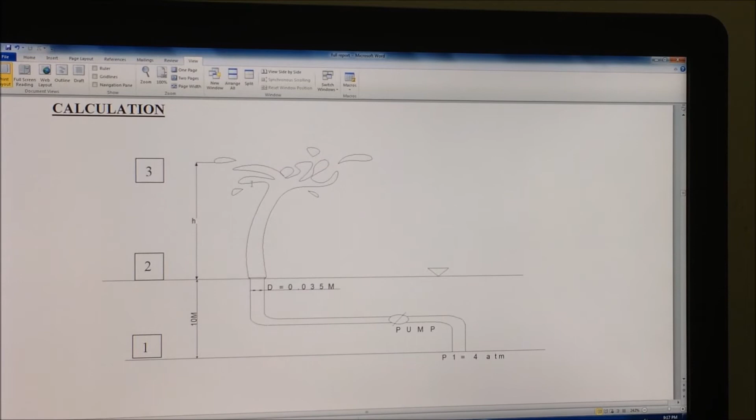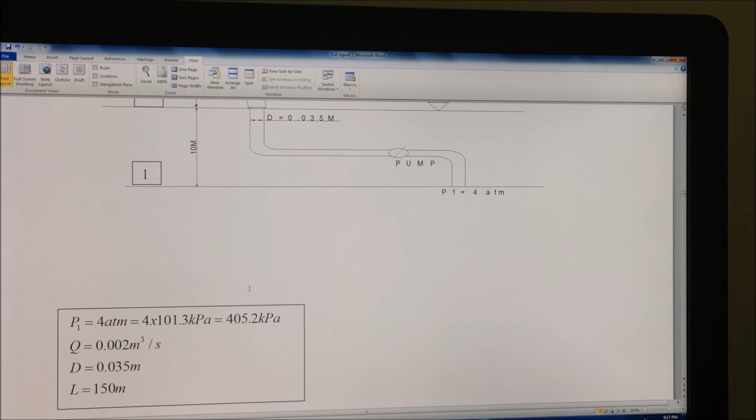Going to proceed to the calculation. For our calculation, this is our assumption for our project fountain. So we assume that the pressure of the underground is 4 atm, which is 405.2 kilopascal. And we assume that the flow rate of the pipe at the exit and entrance is 0.002 meter cube per second, the diameter of the pipe we use is 0.035 meter, and the length is 150 meter. So this is our Bernoulli's equation for our project, which we use to find the head pump.

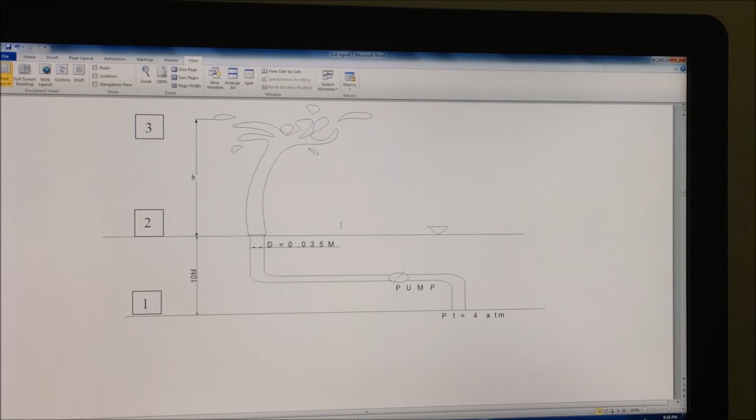So for the first step, we are going to find the velocity of the pipe. We are using the continuity equation, which is Q in equal to Q out. So we can get that the diameter of the pipe at the exit and entrance is the same, so we can assume that the velocity of both is the same, which is 2.08 meter per second. After that, we are going to find the major loss of the pipe.

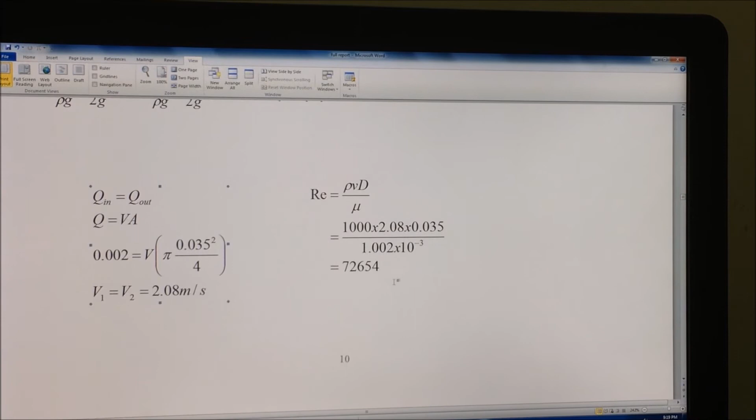We are going to use Darcy-Weisbach for this to find the major loss. First, we are going to find the type of flow of the pipe. So we are going to use the Reynolds number, and we get the answer is 72,654. So we can get that this is turbulent flow in the pipe. After that, we are going to get the value of f, the friction factor.

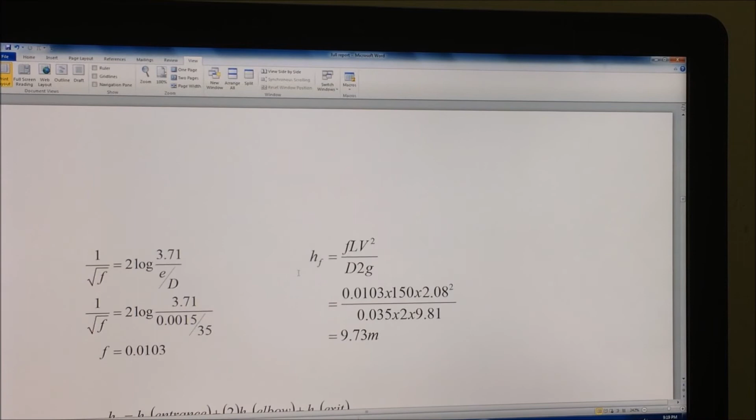We use von Kármán equation to find f, and the roughness e is 0.0015, which is the copper pipe. So we can get that the friction factor is 0.0103. After that, we are going to substitute f into Darcy-Weisbach, and we get the answer of the major loss is 9.73 meter.

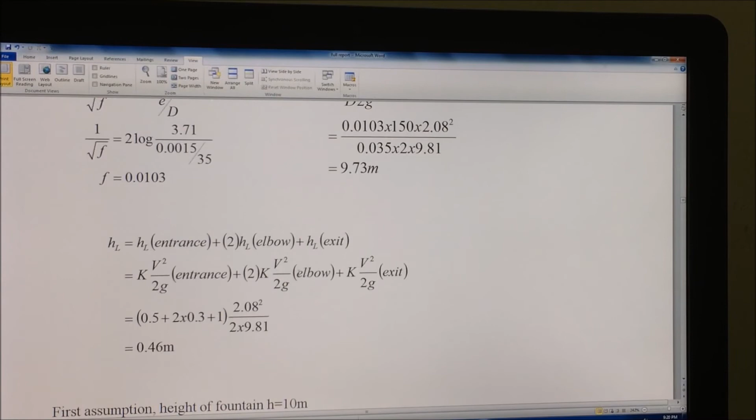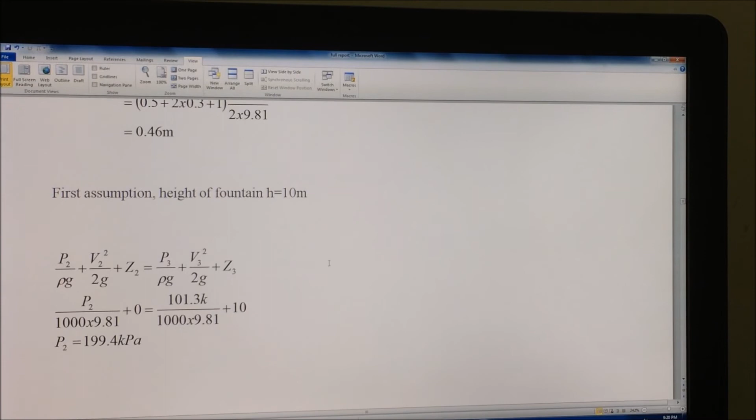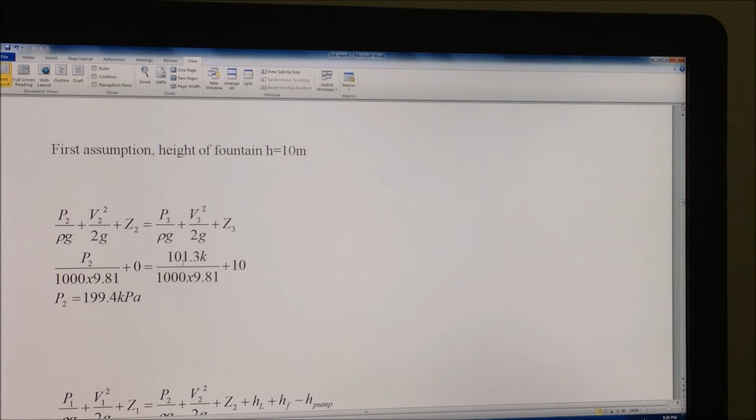After that, the third step is to find the minor loss. Using the minor loss equation, we can get the minor loss is 0.46 meter. So at the end, we are going to assume that the height of the fountain is 10 meter. In the first Bernoulli's equation, we can get that at the exit of the fountain pipe, pressure 2 is equal to 199.4 kilopascal.

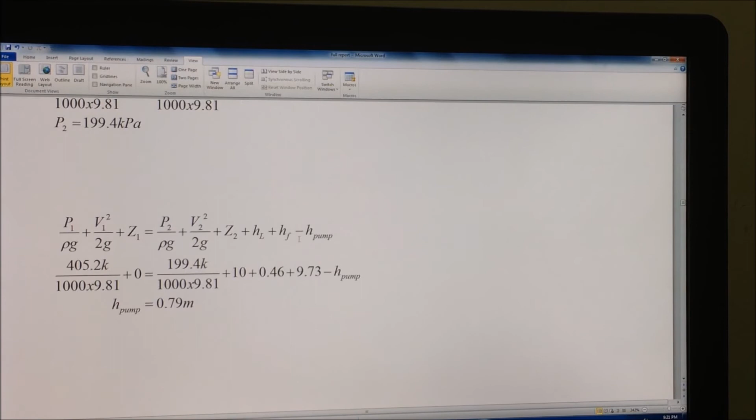After that, we use the Bernoulli's equation again to get the H pump, and substitute the values that we have found and the values we assume into the Bernoulli's equation. So at the end, we can get that the head pump of the pipe is 0.79 meter. After that, we are going to substitute the head pump into the power equation, so we can get the final answer of the power of the pump is 15.5 watt.

And we convert the unit of watt into horsepower. So at the end, we can get that the input pump horsepower is equal to 0.02 horsepower.

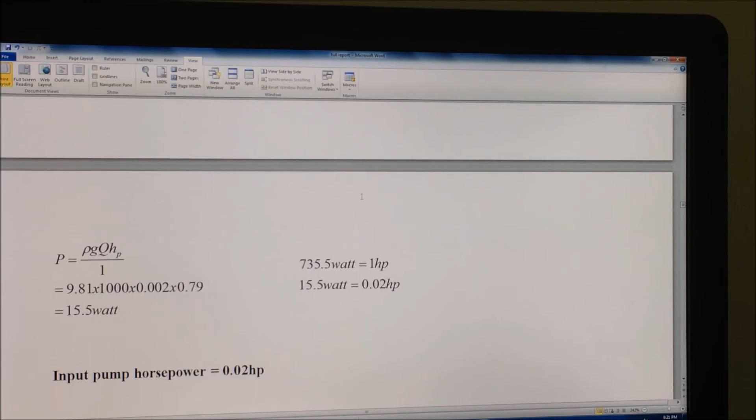That's all. Okay, then Mahathir, what can you conclude from our discussion of the fluid mechanics project? So from what I can conclude, making a fountain at the F-Cast Lake is very good, because the fountain not just gives a better experience for the lake, but also gives a lot of benefit to the ecosystem of the lake. Okay, that's a good conclusion.